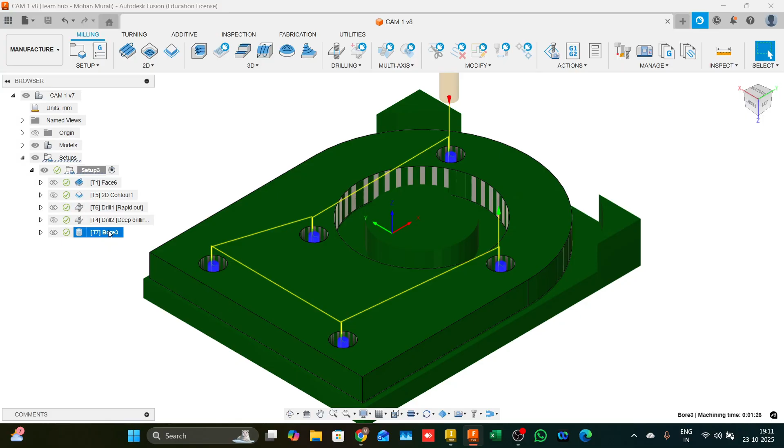Hello everyone. Welcome back. So in the previous video, we saw how to create a bore or an interpolation, and with that, we removed any remaining material in the setup, right? So with that, our part has been completed, except that in the second setup, we'll have to go ahead and remove any excess material. All right. So to do that, we'll have to keep a couple of things in mind.

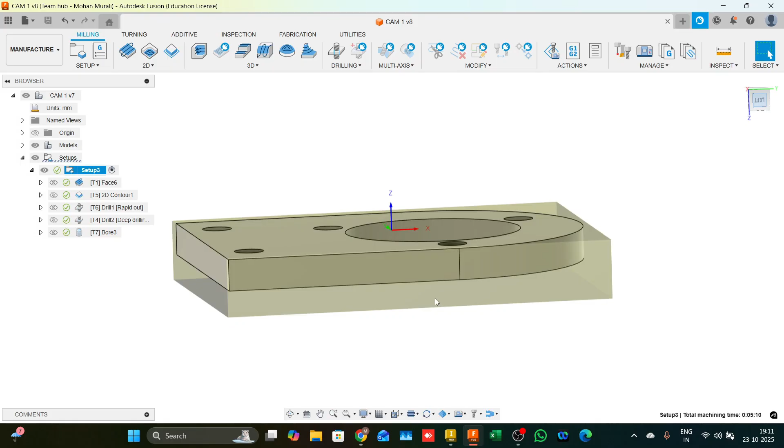First and foremost is the orientation of the part and the leftover material. All right. So in our initial setup, we had taken up the stock to be so, and our plan was that we hold the part in the vise, complete the first setup, and ensure the part is ready. And in the second setup, we'll just do the facing and complete the entire machining, right?

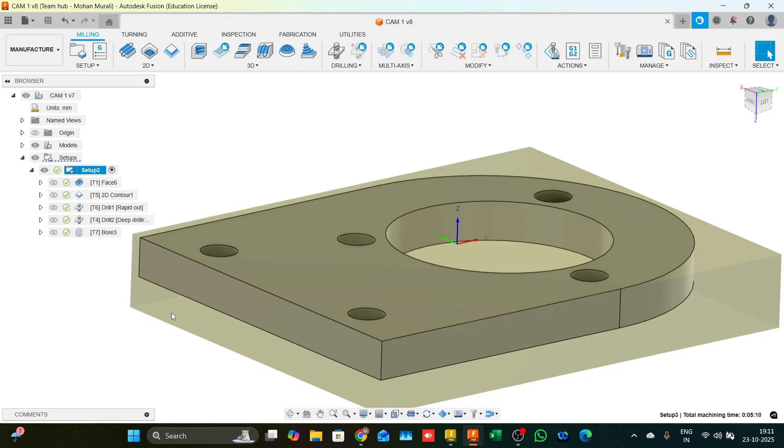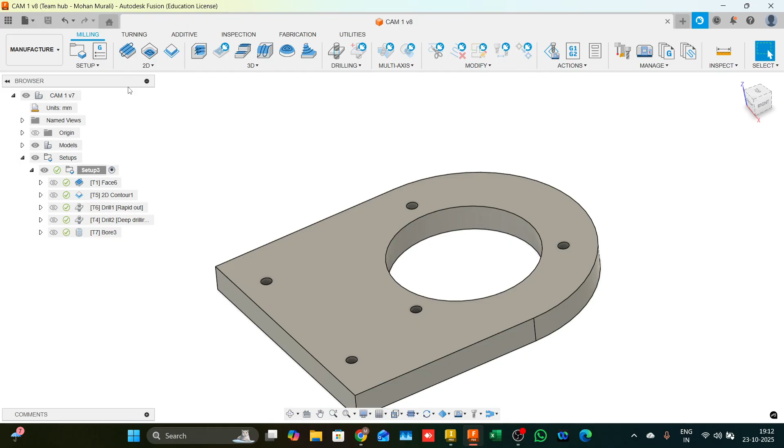So now that our first setup is completed, let's be mindful of in which direction we are rotating our part. So you can notice I'm maintaining the same x-axis direction, all right? And only the y-axis and the z-axis are flipping, right? So I'll position it in the correct orientation, and then I'll go ahead and click on setup. And here you can see that the direction has changed, right?

And under stock, you can also see we have an option called mode, and we have an option called from preceding setup. And we'll have to select continue rest machining, which will allow us to study the remaining stock that is left out. Now that we have done this, we'll come back to our setup mode.

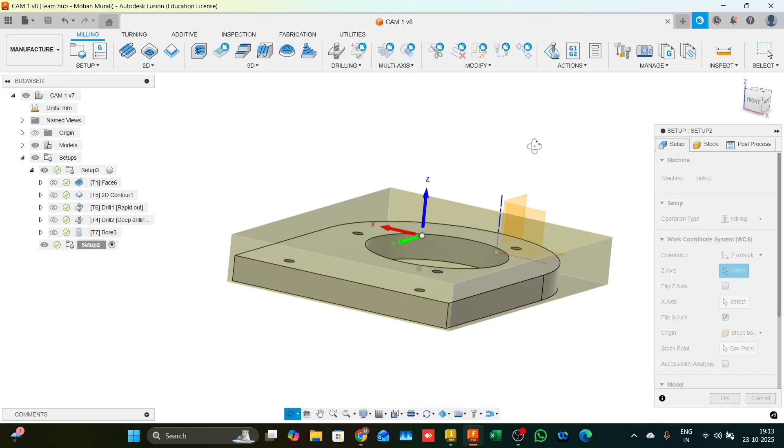We'll select the orientation. Let's ensure we are setting up the x-axis similar to the previous direction that we had set up. So to do this, I'll come down, select z-axis plane, the first option, z-axis plane and x-axis. Z-axis is in the right orientation, no doubt. Now we can just select the x-axis. For that, we'll just go ahead and select any one of the edges and ensure it is parallel. So right now, I'll just flip the x-axis so that it is very, very similar to the previous setup.

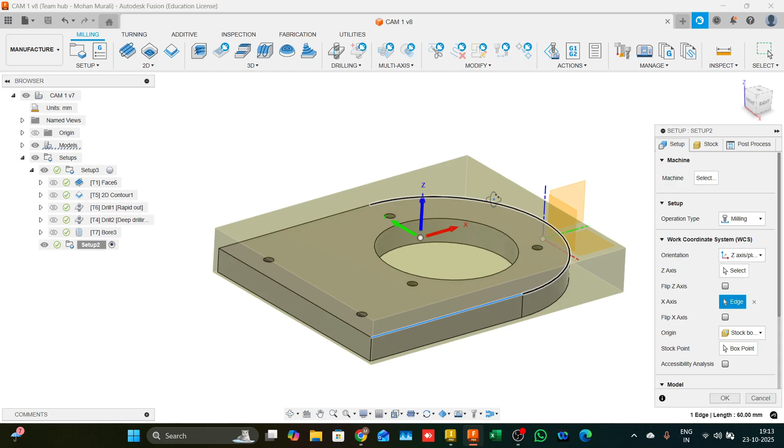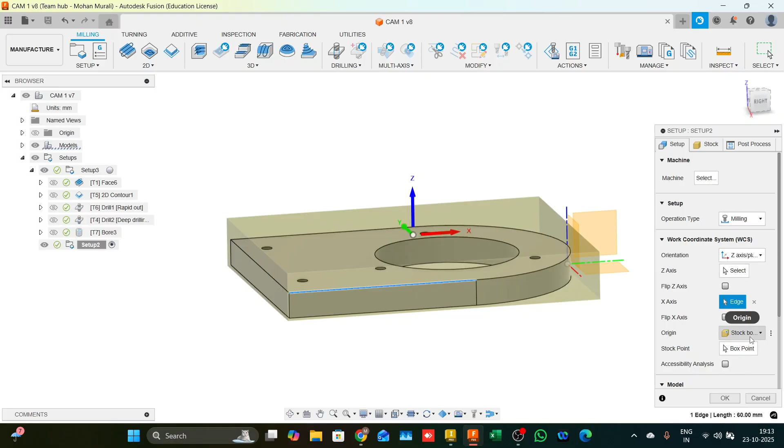Now that this is done, let's be very mindful of choosing where our Z offset is. Right now, if you notice, it is on the top of the raw material. To avoid any confusion, the best practice is to either take the bottom offset or the top of the part. All right. So for that, we can select model box point under origin, and either we can select the top or bottom. So that way we'll be taking the offset from a machined surface. That is very, very important when you are moving to the next setup.

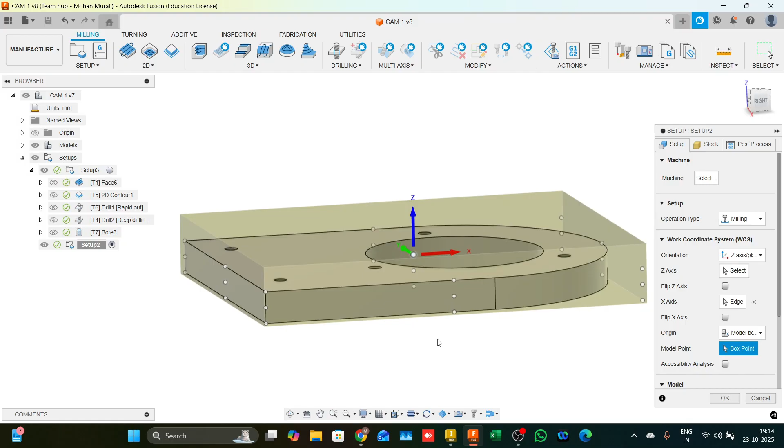In the second setup, we should ensure we are taking the work coordinate system on a machined surface so that we are getting the part very, very accurate. If you are taking it on the raw material, any deviation in the raw material size will impact the part. So right now I'll take the top part offset. So you can see it's on top. We can go ahead and click on OK.

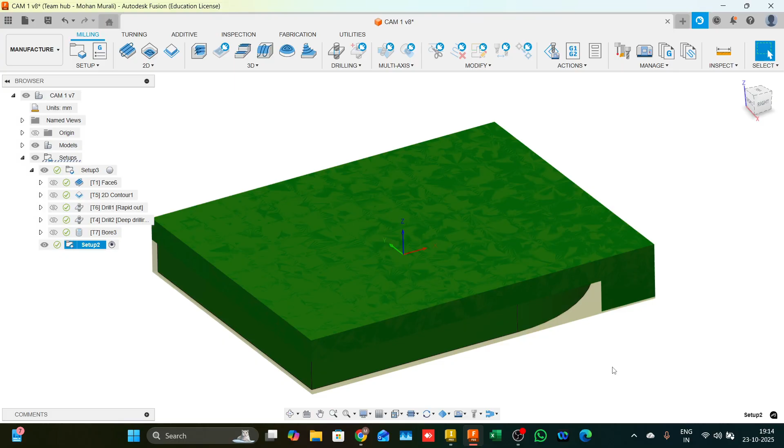So you will notice just like how we had left it over in the previous setup, the same stock is reflecting here. Okay, so that is the advantage of selecting continue rest machining. So in the second setup, we'll only be machining what is left out. Here we have only face. The only option we need is facing. So we'll come down and select the face mill cutter, and you will find the 50 mm face mill. Select the default preset.

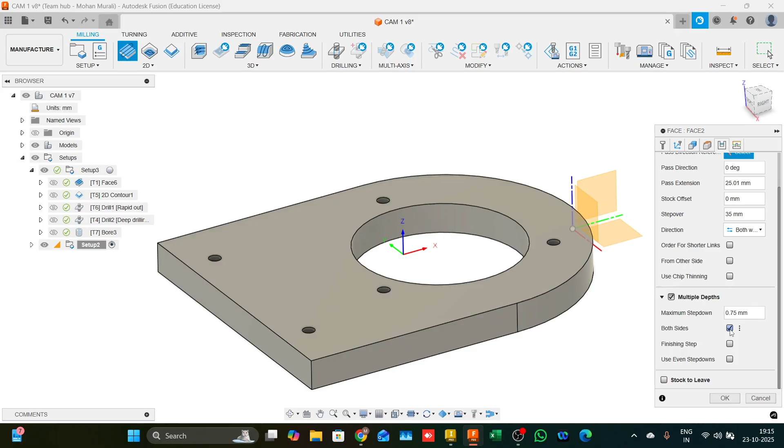And like I had mentioned in our initial videos, facing is a very straightforward strategy where you just select the tool and the geometry is automatically selected. The only main thing that we need to keep an eye on is the number of passes and multiple depths. You can select say 0.5 or 0.75 mm, and you can ensure it is both sides so that we can save some time. All right. Give it a couple of seconds and here we have it.

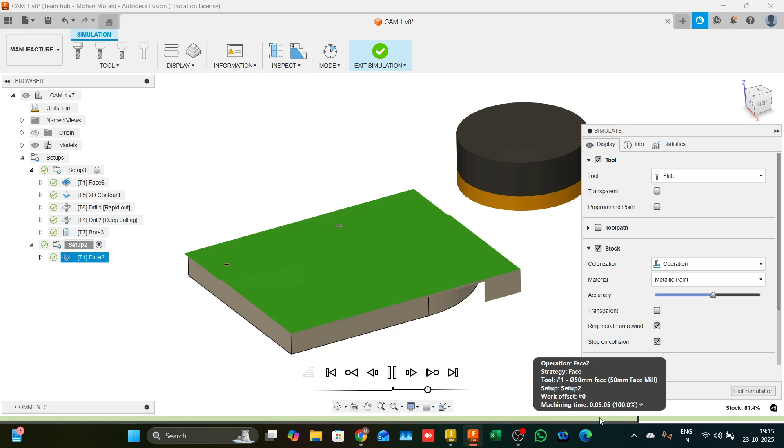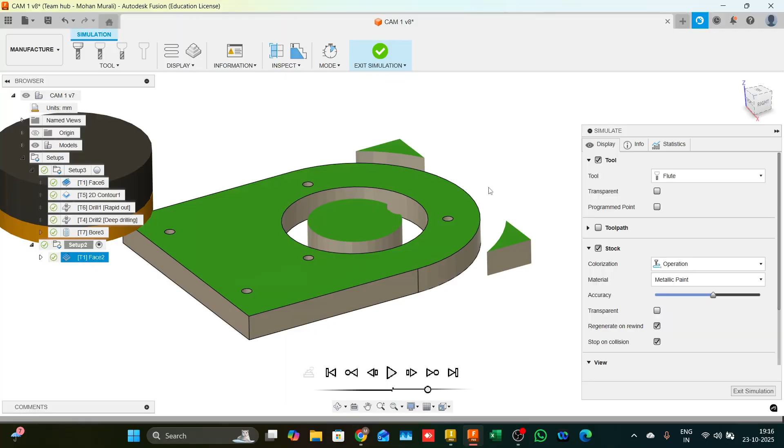Let's simulate the entire setup. Click on play and you can notice the cutter moves up and down in both directions. And as we fast forward, you can notice all the leftover material is being machined out. And now you can see the complete part that is ready. The material that you see in the corners and in between is going to fall off. It's going to get machined off, removed, right? So with this, we are able to complete our second setup as well.

Stay tuned, and we will move on to 3D milling, and we'll look at a much more complex example in the upcoming videos.